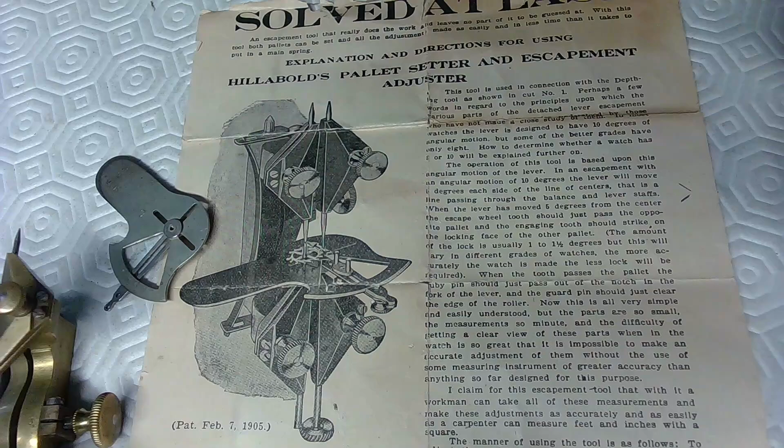Here we have a crazy tool. A solved problem, as it says. It's solved. This is a solved at last. This is an escapement tool that really does the work and leaves no part of it to be guessed at. Bad English. With this tool, both pallets can be set and all adjustments made as easily and in less time than it takes to put in a mainspring. Yeah, right. Explanation and direction for use.

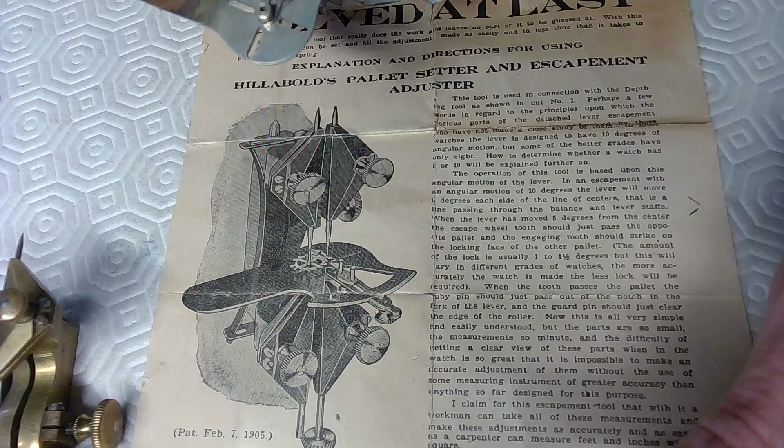The Hillabolds pallet setter and escapement adjuster. So there's the photo on the left-hand side. There's the actual tool right here. And it seems like it's missing a few things if I look at it very carefully. But that's the tool right there. So it says this tool is used in conjunction with a depthing tool shown in cut number 1. I'm assuming that's this here.

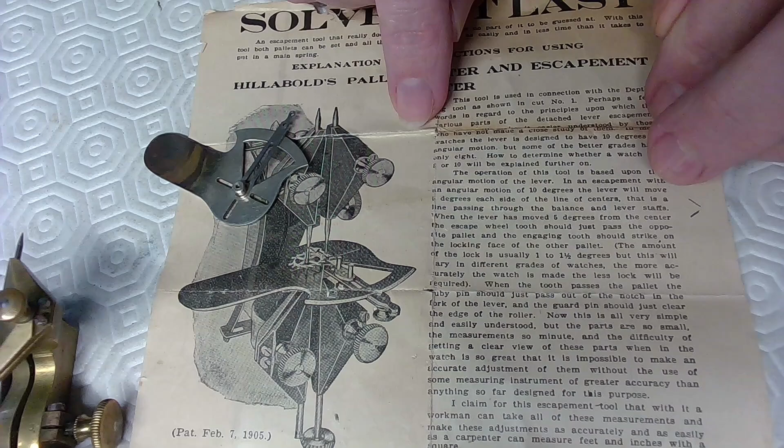Cut number 1. Perhaps a few words in regard to the principles upon which the various parts of the detached lever escapement, and then the words are hidden. The escapement something will make it easier understood by those who have not made a close study of them. In most watches, the lever is designed to have 10 degrees of angular motion. Ooh, is it? But some of the better grades have only 8. How to determine which watch has 8 or 10 will be explained further on.

The operation of this tool is based upon this angular motion of the lever in the escapement. With an angular motion of 10 degrees, the lever will move 6, no, I'm not sure, degrees each side of line of center. That is a line passing through the balance and the lever staffs. When the lever has moved, I think that's a 6, might be a 5. 6 degrees, maybe it's 5. 5 degrees from center, the escape wheel tooth should just pass the opposite pallet, and the engaging tooth should strike on the locking face of the other pallet.

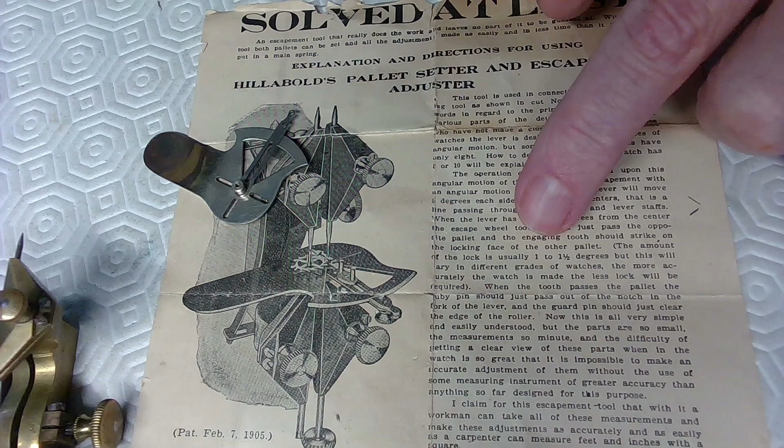The amount of lock is usually 1 to 1.5 degrees, but this will vary in different grades of watches. The more accurately the watch is made, the less lock will be required. When the tooth passes the pallet, the ruby pin should just pass out of the notch in the fork of the lever, and the guard pin should just clear the edge of the roller.

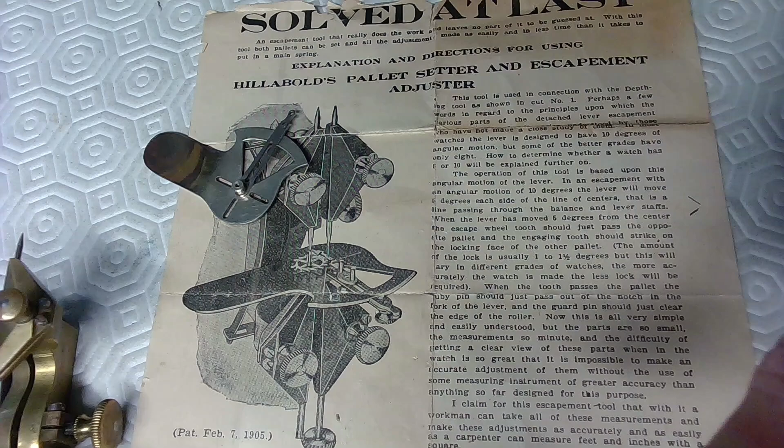They're right there. Now this is all very simple and easily understood, but the parts are so small, the measurements are so minute, and the difficulty of getting a clear view of these parts when in the watch is so great that it is impossible to make an accurate adjustment of them without the use of some measuring instrument of greater accuracy than anything so far designed for this purpose. I claim that with this escapement tool a workman can take all of these measurements and make the adjustments as accurately, as easily as a carpenter can measure feet and inches with a square.

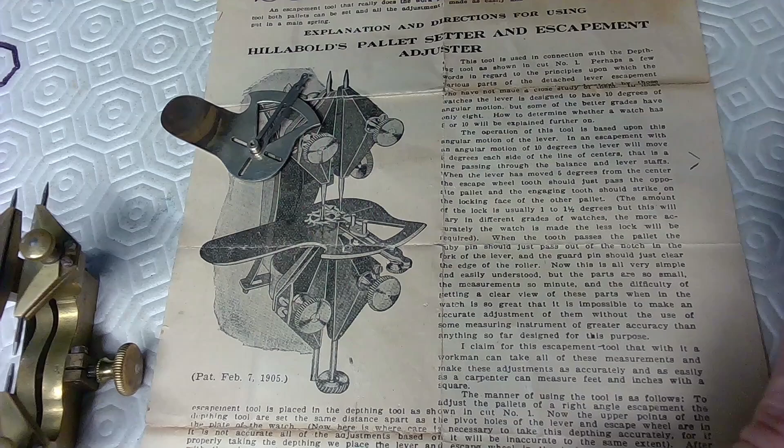The manner of using this tool is as follows. To adjust the pallets of the right angle escapement, this escapement tool is placed in a depthing tool. This, my friends, is a depthing tool that came with this. It needs a bit of work on it, by the way, but it's a depthing tool. So this is placed in a depthing tool as shown in cut number 1. I love the term cut number 1. This thing was patented February 7th, 1905.

Now the upper points of the depthing tool are set to the same distance apart as the pivot holes in the lever and escapement wheel are in the plate of the watch. So set to the same distance apart as the pivot holes of lever and escapement wheel are in the plate of the watch. So that means this here is turned this way and this way so that the distance between these is the same as you'd see in the plate of a watch.

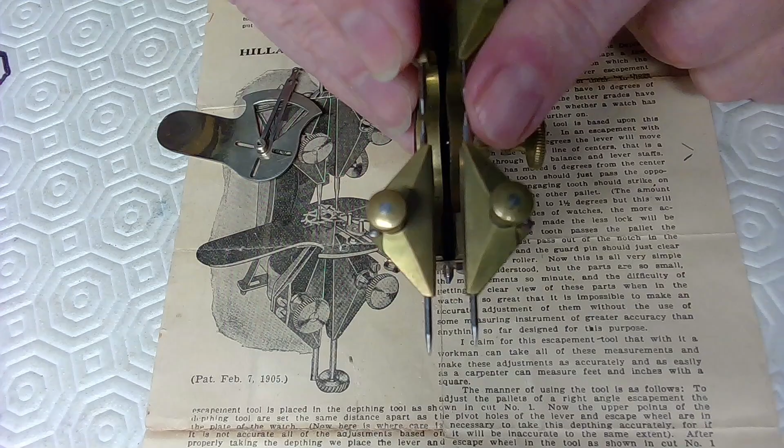I may have to get a plate of the watch out to actually do this. So we'll just keep reading on here. I should have probably tried it out before making this video, but what the heck, we're going to go live here. Now the upper points of the depthing tool, lever, escapement are, okay, sorry, it doesn't matter.

Okay, it is not accurate for all adjustments based on it; it will be inaccurate to the same extent. Okay, after properly taking the depthing, we place the lever and escapement wheel in the tool as shown in cut number 1. That cut number 1 is pretty famous. With the pin on the side of the arm pushed into the notch of the fork of the lever and firmly fastened with the screw on the side. So I don't know whether this has the side screw on it. So I think it's missing a few things actually, this tool. But let's read on here.

The arm of the tool is now set at 5 degrees from 0. In this position, the tooth of the escape wheel should just pass the opposite pallet. If it does not pass, the pallet is out too far. If it will pass before the arm is moved 5 degrees, it is not out far enough. All right. The other pallet is examined the same way with the arm set at 5 degrees on the other side of 0, right?

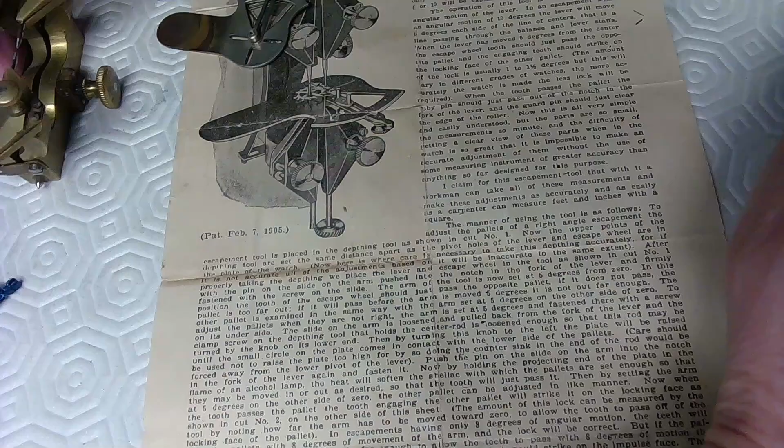So the tool without the depthing tool is $3. The depthing tool is $2.25 extra. Order from your jobber. For sale. So that's the tool there. So if I look at this tool here, just get a close-up of this tool. There's the tool there. Now what I can't figure out is how the hell you use it. I think there's a locking mechanism missing.

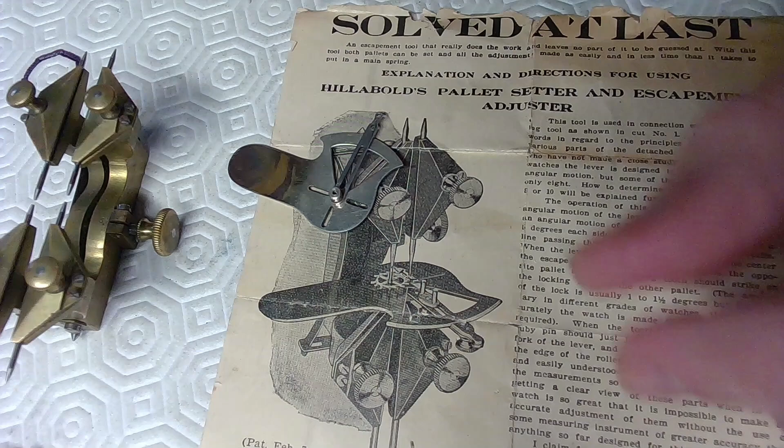So if I look at this tool here, where these two holes are here, I think there is absolutely a locking mechanism that's missing. I think it would be going on the other side, and it would be used to line up this 0 right here. So that's kind of where that would be, and it's not there. It's missing. Right? So this thing is, I think, marginally useless because of that. Now I think that maybe the depthing tool here, the pins go through here, but I'm not sure what lines up here. So if anyone's ever used this tool, please let me know.

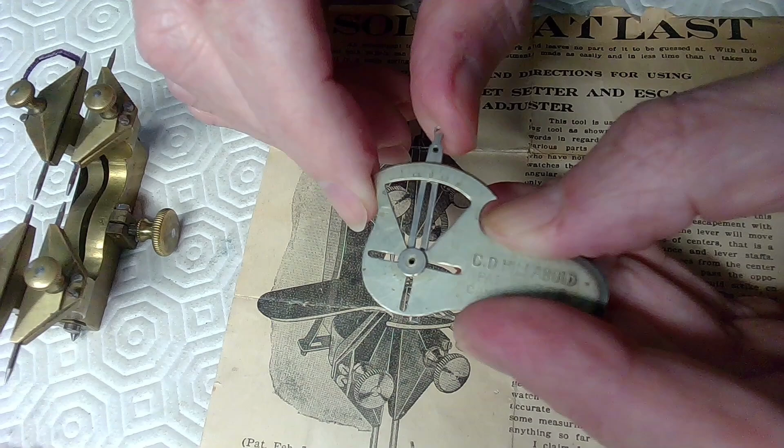I know this does this and this, right? But I can't lock or unlock anything the way this tool is currently sitting. So I may have been ripped off buying this thing because it looked really good. The article in the newspaper is pretty cool, I gotta admit. And this is an original piece of paper that's even darkened for the era, right? So this is something I need to put up on the wall somewhere because it's kind of cool with the tool, and just call it a day. But I think it is absolutely useless to use.

And the depthing tool is fine. This is a spring in the back end of the depthing tool, and these go in and out like this, and you can use it to ensure that the gears mesh properly. So I'll have to clean this depthing tool up. I already had a depthing tool, so now I've got two depthing tools.

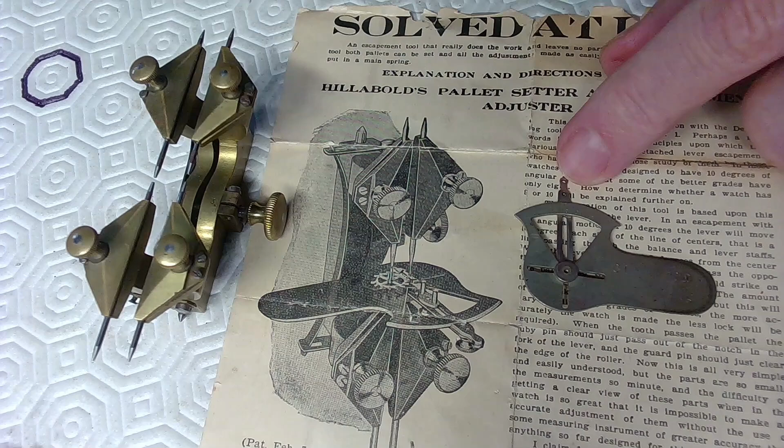And I'm going to do some work on this depthing tool, clean it up and make sure it works properly. But based on the instructions here and the condition of this tool, I think I'm shit out of luck. I think that's what the technical term is. SOL.

I'm looking at this diagram though, and I'm looking at where the lever, if I look down here and I see there's the escapement right there, and there is a device right here that's supposed to be part of this tool that's not in it, and I think this slides up and down here, and it's not available as part of this tool. And obviously the screw in the back here is not there, so it's missing a lot. Now I think the other side of the paper has got a diagram of this thing too.

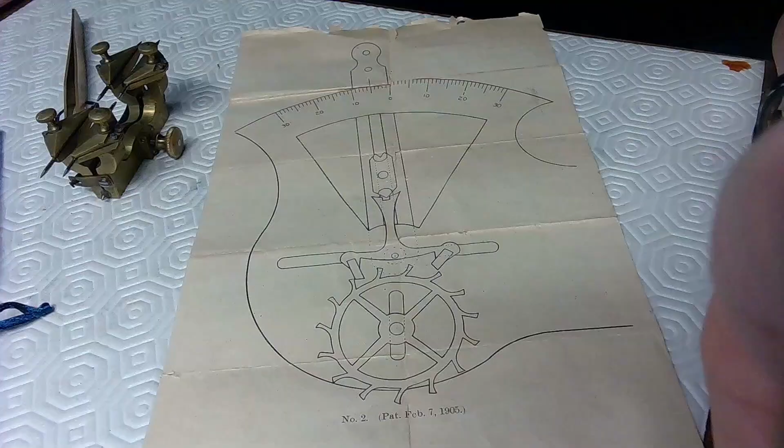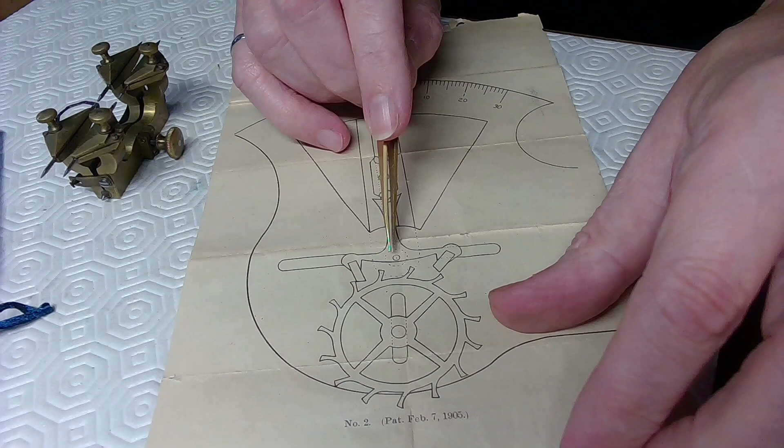Alright, there's the diagram of the tool. So what it's missing is this device in the middle here, right, that interacts with the pallet fork. So that's of no use, right? And as you can see from this perspective of this tool, the pallet fork would be resting right in the middle of the tool. So if I looked at this tool and the way it sits, it would sit like this. And sitting like this would mean that right in here would be the device that interacts with the pallet fork.

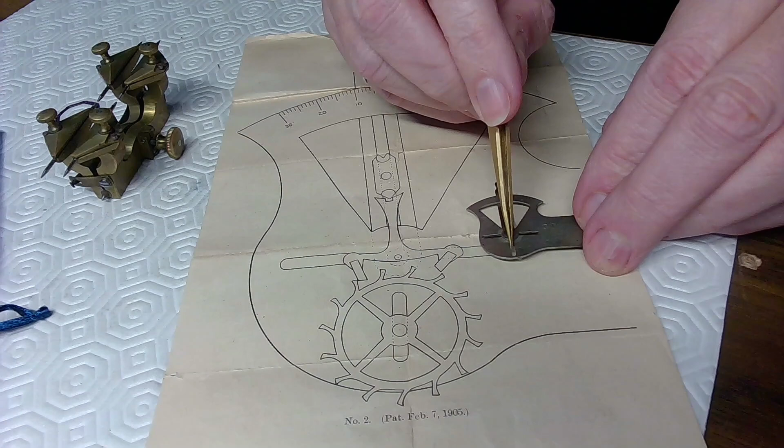And then sliding down here would actually, yeah, that would be this wheel here, right, the escapement wheel. So, and patent number 2, I think this is page number 2 or something. It can't be number 2 patent, but 1905.

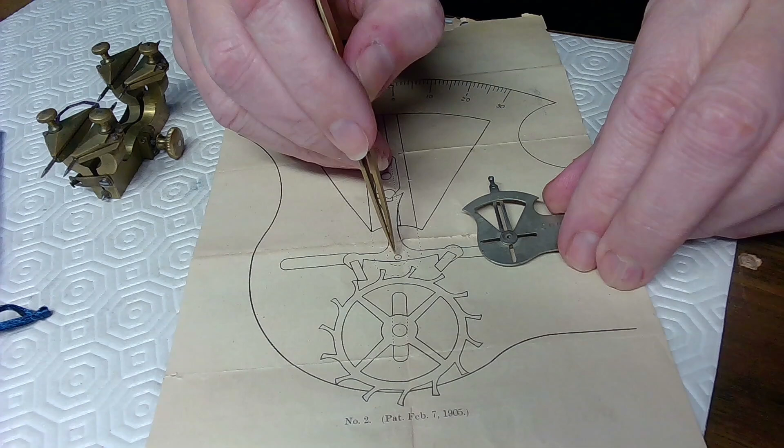I'm gonna have to look up the patent for this, because this pallet fork then should rest right in the middle. But I don't like the fact there's nothing there for it to rest on in the middle. There's absolutely nothing. And this is raised up on this side here. It should be raised up for a reason. But there's nothing for it to rest on.

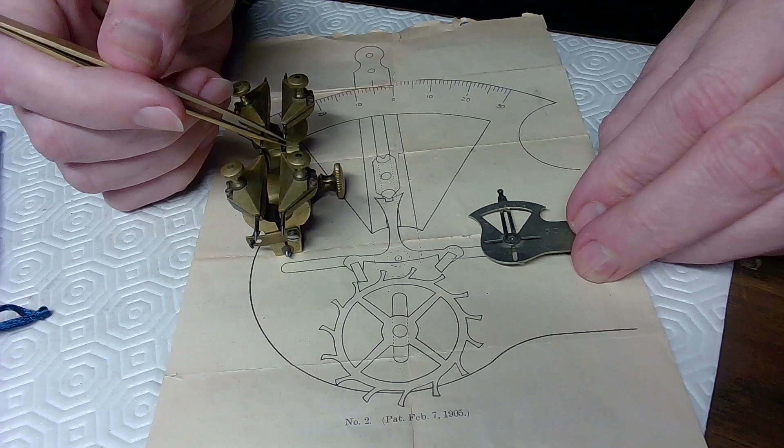So if I'm assuming that on one side, this tool, right, one of these arms here goes through the hole here to hold the pallet fork, right? The other arm has to go through here to hold the escapement wheel, and then you use this here to go back and forth, right, to move the pallet fork left and right, the 5 degrees that they talked about, to watch the action here, and then you're adjusting the stones in the top, right, for lock and release, right? That's how this thing works.

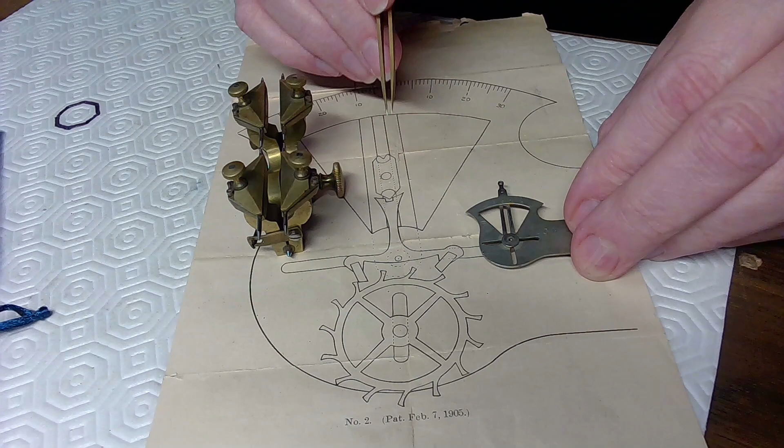So I would have to make something out of brass that would sit in the middle and be attached like this, so that I could move this back and forth. And I'm not sure about the notch back here, what that would be used for, but I'm sure there's a use for it. So that's that, right? Anyway, that's the tool. It's a bit of a vintage tool. I love the diagram here.

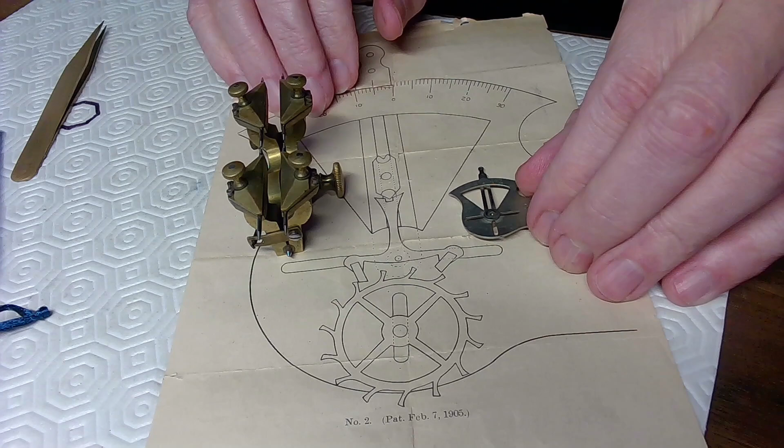This is really nice, but as it is right now, the tool is absolutely useless because it will not provide me the functions of locking this in place, even though I might be able to just move this slightly, but I likely wouldn't use it to measure the depth of the stones here on the pallet fork.

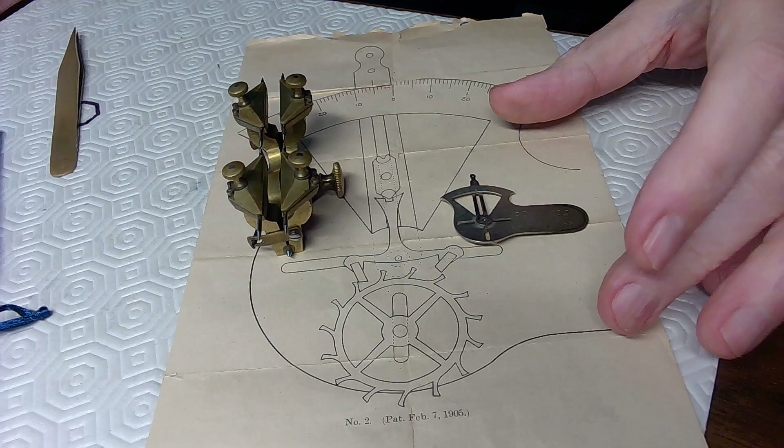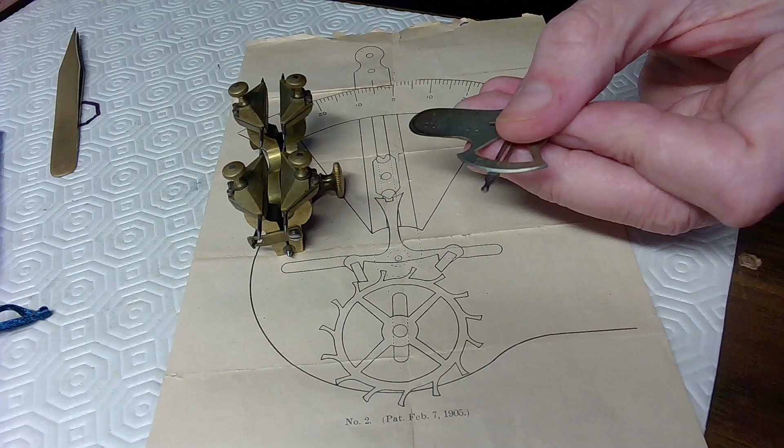And I think I just figured out as an engineer how am I gonna adjust this properly, and what would I use it for, right? So, and this is from, yeah, Hobart. There is a patent number in here, but it's very hard to read. Yeah, patent. Oh, I don't know what it is. 8705, something like that. Canton, Kansas. So there it is there. Hobart patent. There's a number there, but I think it's just worn out.